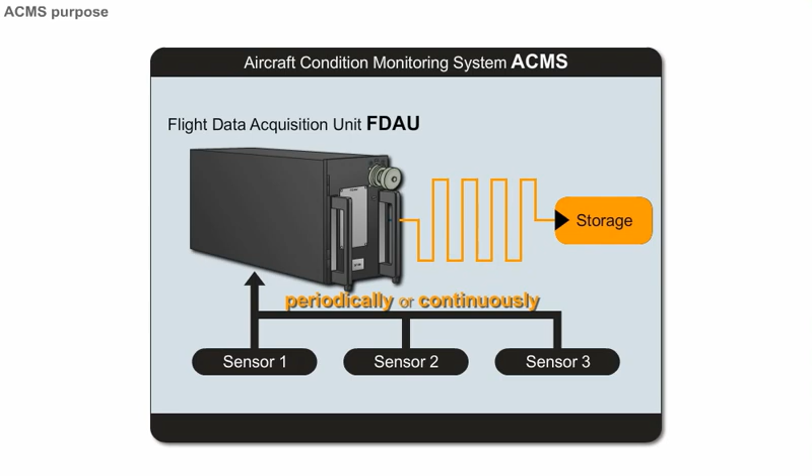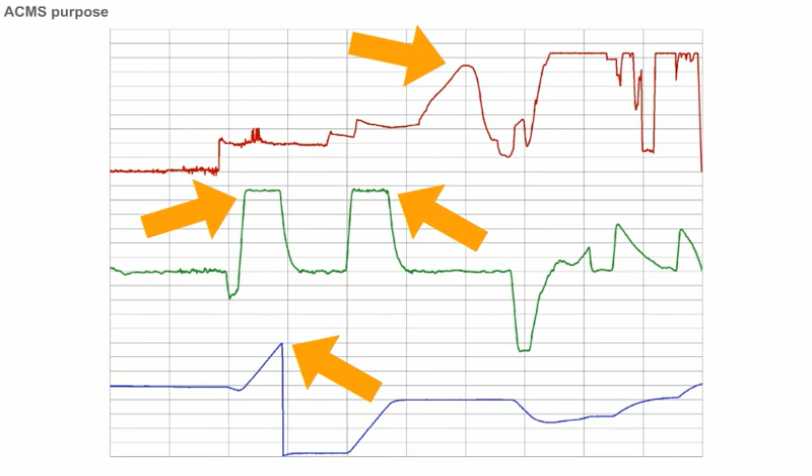Depending on the aircraft subsystem, data is measured either periodically or continuously, and is stored digitally. Significant changes that may indicate a failure already in progress can be determined easily. This allows the operator to plan maintenance actions in order to avoid in-flight failures and to feed Flight Data Monitoring, FDM.

Continuous condition monitoring is typically applied to the engines and their related subsystems.

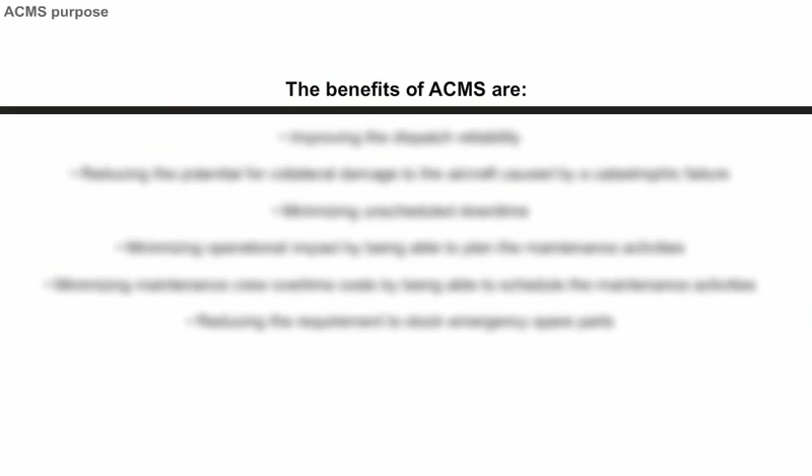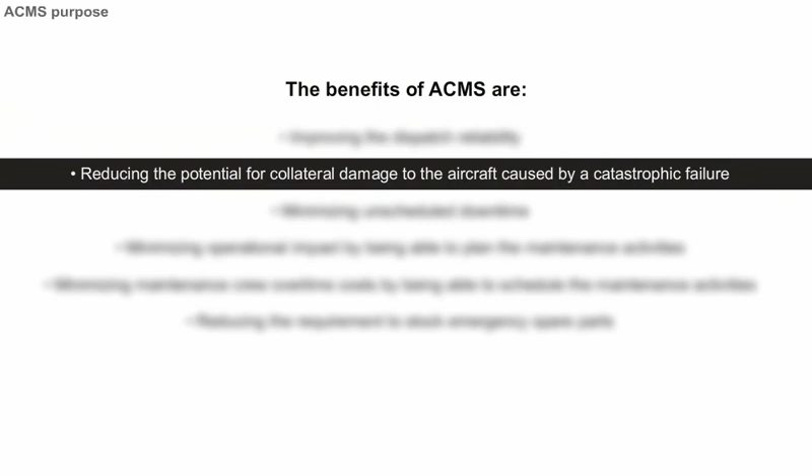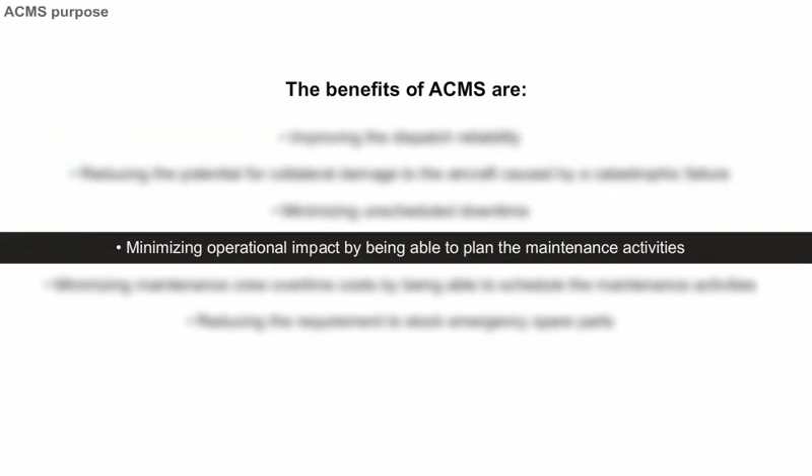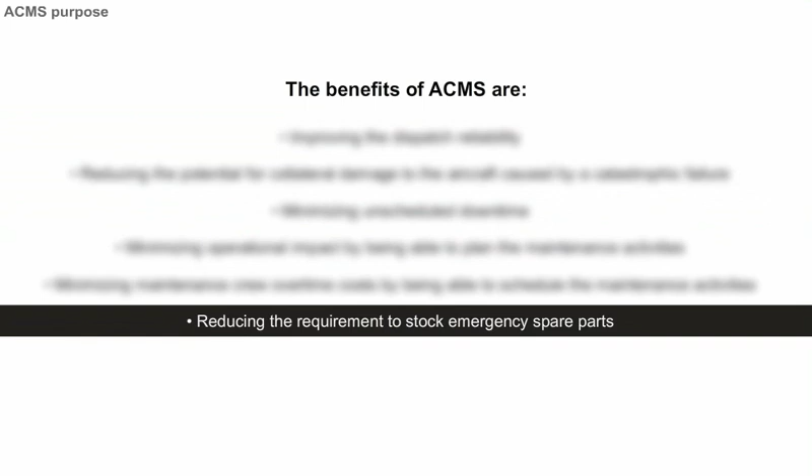The benefits of ACMS are improving the dispatch reliability, reducing the potential for collateral damage to the aircraft caused by a catastrophic failure, minimizing unscheduled downtime, minimizing operational impact by being able to plan the maintenance activities, minimizing maintenance crew overtime costs by being able to schedule the maintenance activities, and reducing the requirement to stock emergency spare parts.

Here are a few abbreviations related to FDM, just so you have heard them once. Operational Flight Data Monitoring, OFDM, is the proactive use of recorded flight data from routine operations to improve safety. Flight Operations Quality Assurance, FOQA, is an American designation for OFDM.

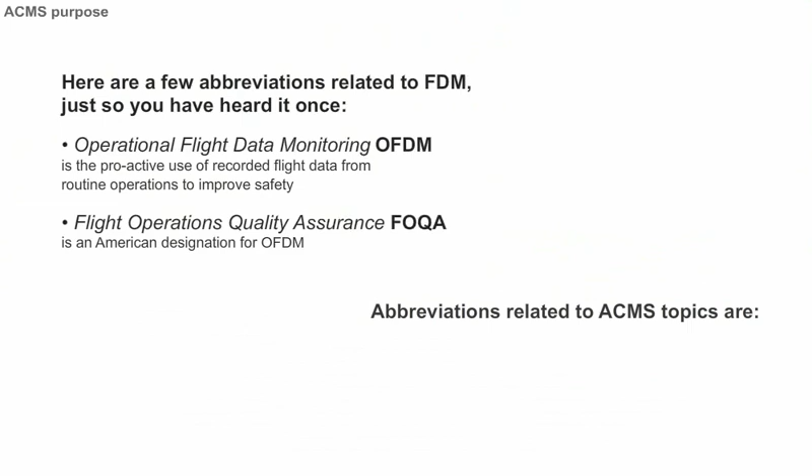Abbreviations related to ACMS topics are Aircraft Health Monitoring Systems, AHMS, Condition-Based Maintenance, CBM, and Central Maintenance Computer System, CMCS.